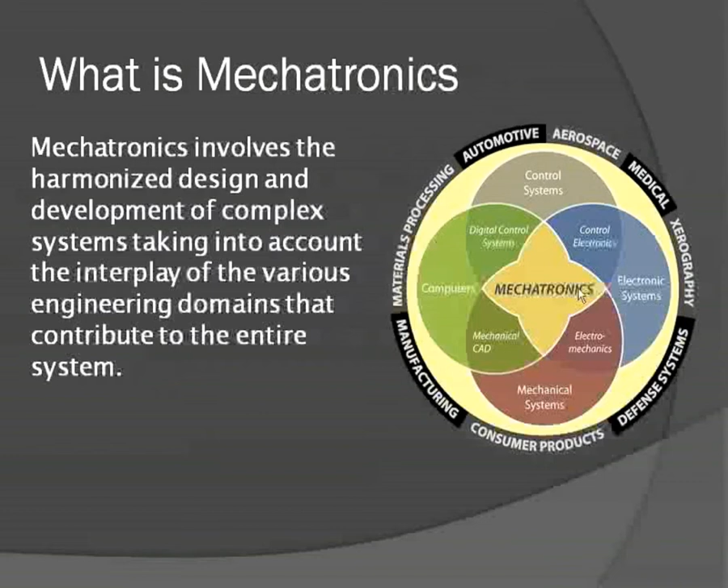So you don't just design a mechanical system, you don't just design an electrical system, you look at the system as a whole and design from the bottom up, taking into consideration all the elements that will eventually comprise the system. In the traditional design approach, and maybe in the last 10 years things have started changing, I'm looking only at two domains for now, but this can stretch out to a variety of domains, not just mechanical and electrical, but anything from aerospace to chemical.

Engineers typically design the core of the system, the mechanical design. They might do some simulations as the tools are available, and they also design the electrical system. There's always interplay between the electrical and the mechanical design, which are based on system requirements and specifications. And simulations are run independently. The mechanical system is simulated without taking into account the electrical characteristics of the system, or vice versa.

The electrical design is performed using the CAD tools that are readily available and simulated. And then eventually, typically they approach the control engineer and they say, well, here it is, we built it, now control it.

So mechanical design is done by itself, electrical design is done by itself. Eventually, a control engineer is brought in and they're asked to control the system. And the control engineer will run some simulations based on the system that's passed on to them. And as time goes on and simulations are showing potential performance, then the system is constructed and integrated. And as the system integration proceeds, there are more and more simulations and control design issues that are encountered.

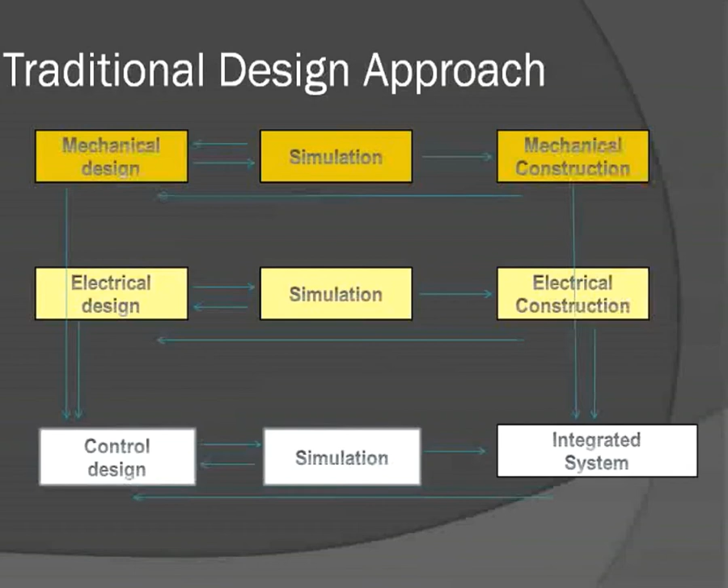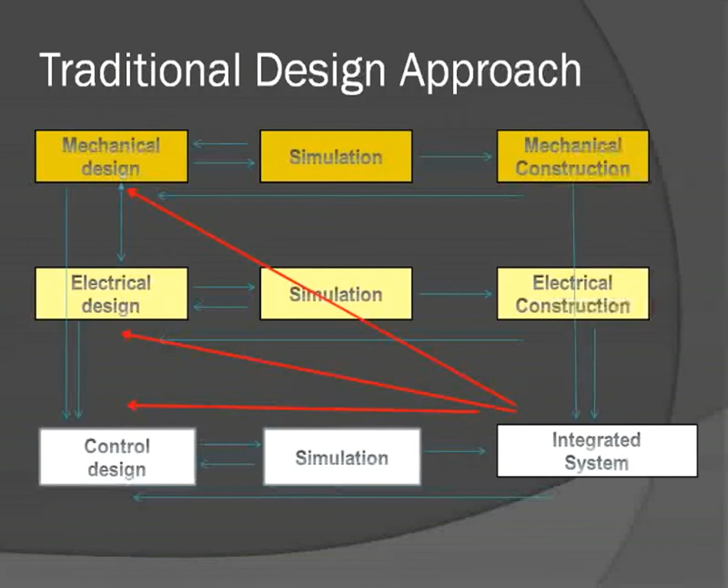So typically, you go back and start looking at the control system given the mechanical and the electrical system that you've constructed. Unfortunately, sometimes it doesn't work out, so you end up having to go back to the drawing table and doing some mechanical design and electrical design given the lessons that you learned from the system integration. We try to avoid those steps, try to do things more this way. But again, the system is not designed holistically. Parallel paths are taken, and eventually they're intersecting at the integration of the system.

Mechatronics, however, tries to approach the entire design in a holistic way. Holistic meaning taking into account the entire system with all its components. So not separate designs, but all designs are performed synergistically. And while one is looking at the electrical characteristics of some part of the system, they are also considering how this is going to integrate with the mechanical system, what controls are required, what kind of computer characteristics are required, what power requirements are required. They're all taken into account all together with constant interaction between the teams that are responsible for different domains in the system.

So in the mechatronic approach, you don't just do the parallel design of the mechanical and the electrical in this case. You would also take into account the control system, which as the design is progressing, is always feeding back into the mechanical and the electrical design, specifying constraints and capabilities of the system, as well as the constraints that are imposed by, let's say, the computation capability of the computer that's going to be used. And then the simulations would not be run just in one domain, they would be run in multi-domains. So you'd have a simulated system that incorporates all the domains into one simulation.

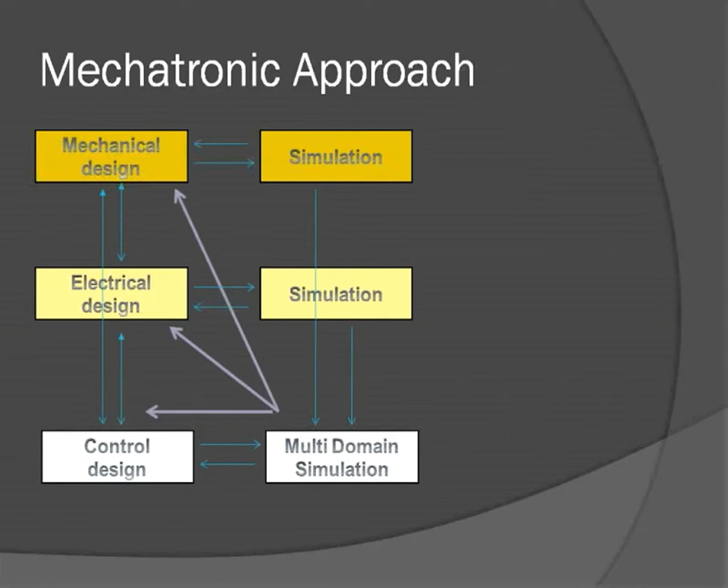Now that could result in a very complex system requiring a lot of computational power. However, you may simplify the simulations to incorporate just black box responses, but at any rate, you're always doing a multi-domain simulation, not ignoring one component while doing a design. And that multi-domain simulation can result in reviewing the mechanical design, the electrical design, and the control design. And once these changes are done, they should be automatically integrated into the multi-domain simulation and proceed from there. Once you're comfortable with the multi-domain simulation, if you can, you should also perform some hardware-in-the-loop simulations, taking into account some of the hardware that's already constructed, not necessarily in the same time scale.

And 3D animations are always helpful, so the multi-domain simulation would be running a 3D animation of a mechanical system if there is one. If it's purely electrical, then you can't do 3D animations. But 3D animations are very useful in visualizing what the performance of the system is in real time and changing parameters in hardware-in-the-loop simulations and observing characteristics and behavioral changes. As the simulations become more complete and satisfactory, then one would move on to constructing the mechanical system and then integrating that mechanical system into the hardware-in-the-loop simulation.

Ideally, the hardware-in-the-loop simulation would end up as the actual deployed system. So as you're developing hardware, you're also developing the deployed system. It could be an embedded system. You might be developing a hardware-in-the-loop simulation with the actual embedded controller. As the hardware-in-the-loop simulation progresses, you might be tuning the control design, but really avoiding these last two dotted lines that take you back to the mechanical design and the electrical design.

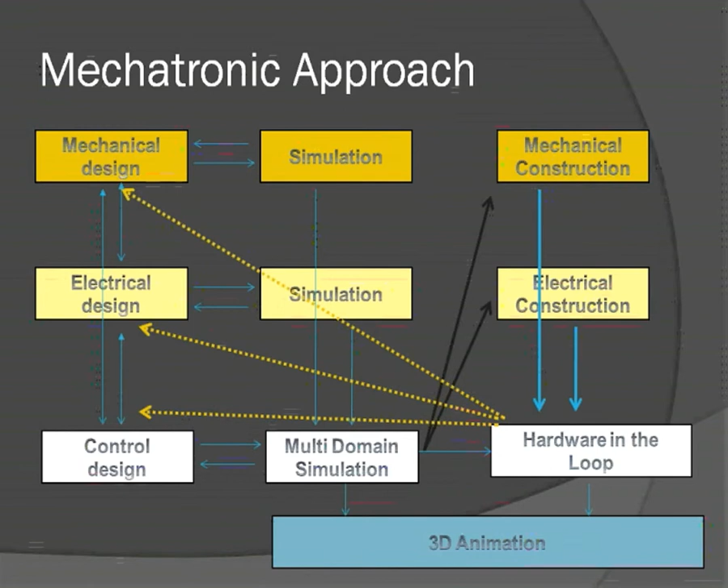So in concept, I'd like to look at what rapid prototyping means and how this relates to the mechatronic approach. Rapid prototyping has a common definition. If you look on the web, you'll find definitions for rapid prototyping. With Wikipedia, we're all becoming wikidemics.

You can look at Wikipedia and find out that rapid prototyping means the automatic construction of physical objects using solid freeform fabrication techniques. There are many products on the market that will take a SolidWorks drawing and make a physical object that is as close as possible to the SolidWorks drawing you designed, and therefore use that for prototyping. But that is only physical prototyping.

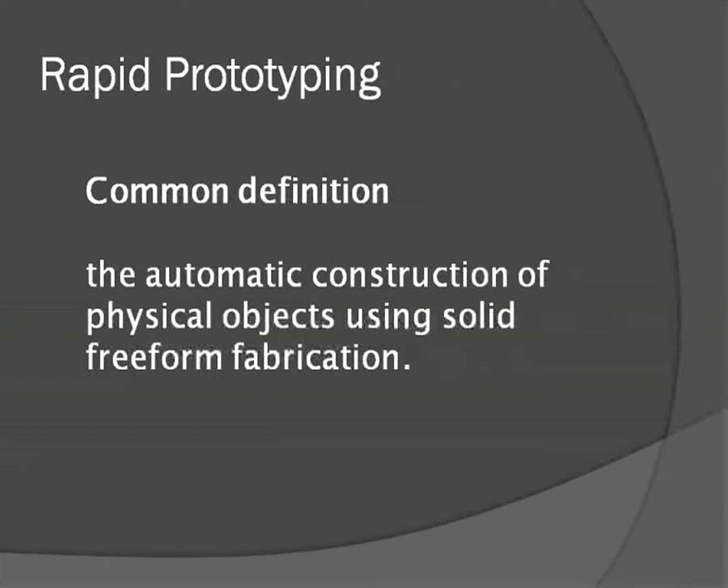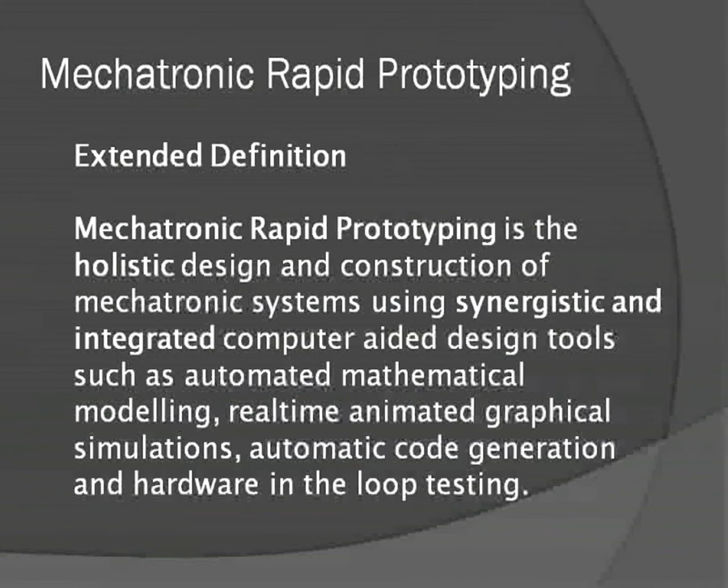I'd like to extend that definition by introducing this new term, mechatronic rapid prototyping. I'm extending the definition of rapid prototyping such that it encompasses the holistic design and construction of mechatronic systems using synergistic and integrated computer-aided design tools, such as automated mathematical modeling, real-time animated graphical simulations, automatic code generation, and hardware-in-the-loop testing.

So the ideal mechatronic approach would start with a concept which covers all domains. Let's say you want to design something; you figure out what domains you're working in, and you start with a very general concept in all domains, taking into account the interplay between them. As you're developing, you're also developing modeling and simulation in all the domains involved, and those feed back into each other until you have a concept you're comfortable with.

As the concept develops, you start performing some hardware-in-the-loop simulations before you do any kind of construction. From that, you loop back to the concept, which might require some design changes in some of the domains. But as soon as you make a change in one of the domains, that should automatically reflect into the multi-domain simulation. So any change done in any of the domains is always updated in the entire simulation paradigm.

As the hardware-in-the-loop progresses, you can start using rapid construction techniques, some of which could be the physical prototyping methods I described earlier. Along with that, you can use rapid construction of circuit boards, or outsourcing that can rapidly construct parts for you. Some things you cannot make in-house or with rapid prototyping techniques. You might have to do things in faster ways, but not in the traditional way.

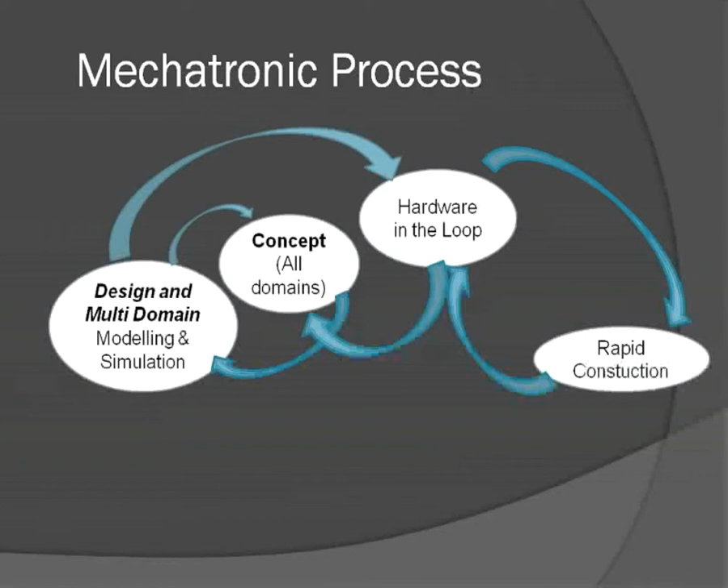Like you avoid injection molding by using rapid construction, using SLA or 3D printing techniques. You can also avoid large runs of circuit boards by going to rapid board manufacturers and assemblers. And that loop closes back into hardware in the loop. As you construct the system in components, you might eventually build up the entire system using rapid construction techniques, and then you're done.

Hopefully, you can also develop some 3D animations at the same time. So before you do any rapid construction, you are getting a better feel of the system using 3D animations that are run directly from the multi-domain simulation and the hardware in the loop.

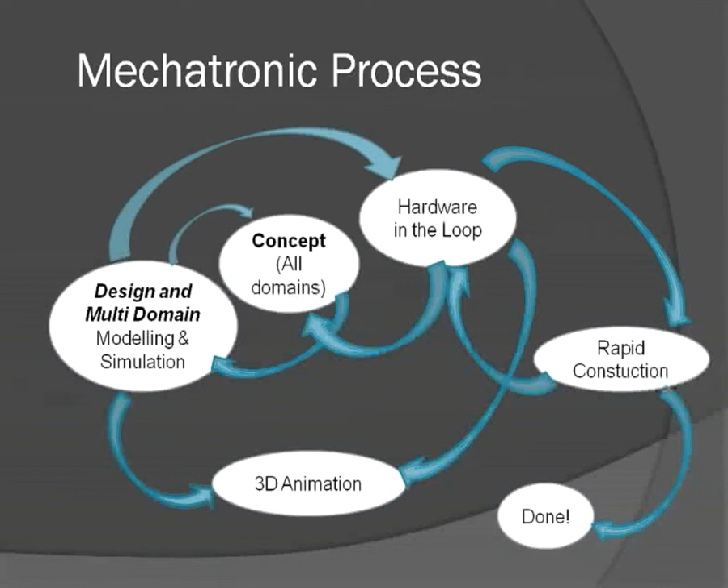So are we there yet? Can we really do this kind of approach? Well, all the tools are there, and we're striving as time goes on to develop a method that would lead us into this rapid scheme of developing mechatronic systems. So the tools are there, but they're not synergistic or integrated. I'd like to define those terms.

By synergistic I mean the interaction of two or more CAD tools such that their combined effect is greater than just the sum of their individual effects. So you might have a mathematical modeling tool, and you might have a 3D solid modeling tool. By themselves they're great, and each one individually can save you a lot of time. But when you combine the two together, you might get a tenfold improvement in productivity and in error-free performance than if you used one and then the other sequentially.

And by integrated, I mean organized or structured so that the CAD tools function together seamlessly. I don't want to use one package and then move to the other package and launch some other kind of interface and have a complicated way of connecting the two together. I'd like to do this seamlessly without manual or programmer intervention.

I'm talking about a wish list here. I'm not saying this is done. This is how I'd like to see things moving so that we can move into a rapid prototyping environment for mechatronic systems.

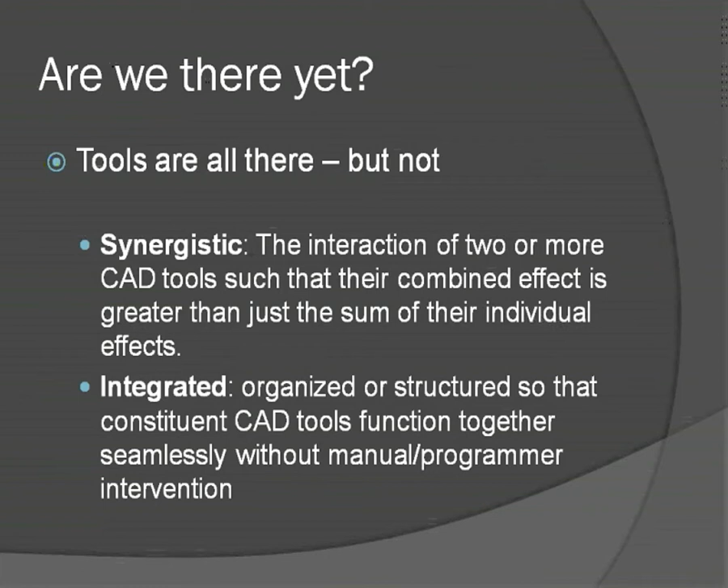The tools that are there, we use a lot of these tools at Quanser. For mechanical, we're using SolidWorks. For electronics, we're using CADStar. There are many other systems out there that perform the same type of work as SolidWorks and CADStar.

For modeling and symbolic math, we've been using Maple for close to 18 years now, and Maple meets our needs for symbolic math and simulation quite well. Design and simulation, we use MATLAB and Simulink regularly and consistently, and we've integrated MATLAB and Simulink seamlessly with a hardware-in-the-loop development system called QuaRC. QuaRC is developed by Quanser and supports code generation from Simulink to run real-time code and perform hardware-in-the-loop testing as well as deployment.

For animation, we are using OpenGL, and sometimes when it's too difficult to actually develop the dynamical equations of a system, we have looked at the PhysX engine to give us dynamic performance in simulation mode only for some dynamical systems.

I'm going to go through some examples on how we have attempted to use this rapid prototyping approach for mechatronic systems using three different applications that we've worked on in the last few years. The first one is a handwriting reproduction robot. So the goal of this project was to develop a robot that will reproduce signatures from a remote tablet.

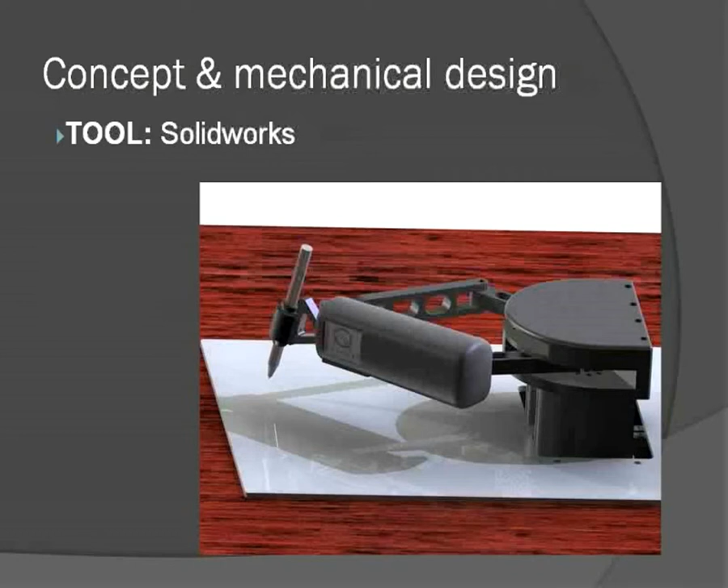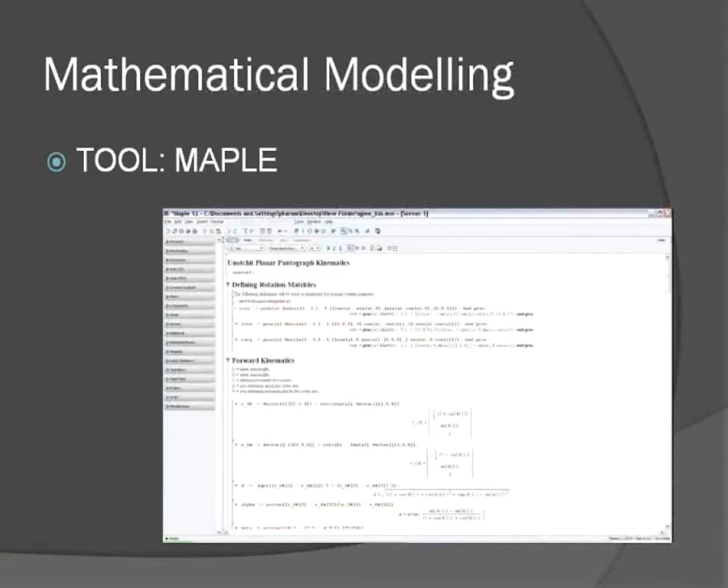So when we want to derive the mathematical models for this thing, we rely on Maple heavily. With Maple, we start from the basic principles, defining transformation matrices, as well as Lagrangians and dynamics to develop the differential equations. Once we have entered all this in Maple, we have a systematic way of going through the equations, letting Maple solve a large chunk of the equations, thus producing error-free differential equations and kinematic transformations, and converting these into C programs using the code generation capabilities of Maple.

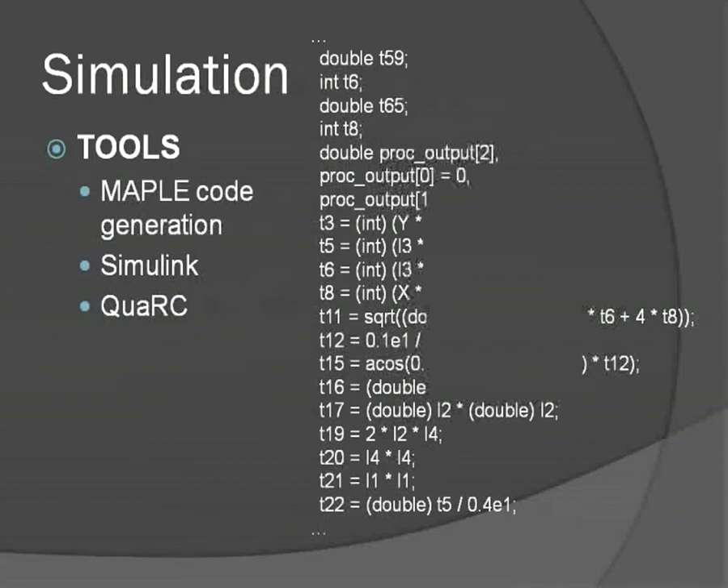Once we do that, then we can develop a simulation of the system using the Maple code generation and embed that into Simulink S-functions. As you see here, I have a section of code that was derived from that code generation section of Maple. Anybody who's using Maple code generation can recognize their temporary variables, T3, T5, T6, T8, etc.

So we embed that all into a Simulink S-function, which will now run in real time using QuaRC, and we can run real-time simulations on the system without actually building it in any way. We did not attach this to any graphics in this case because it was only a 2 degree of freedom system. We were able to monitor the X and Y motions using simple XY plots. And we were able to tune the system, and from SolidWorks, we can also get all the mechanical characteristics of the system, like joint center of mass, inertia, masses, and embed that all into the code-generated functions.

And the nice thing with the code generation, they can all be parameterized. So it's not a differential equation for which you have no control over the variables. You can actually individually change variables on the fly, right from the simulation, and observe the changes in the system dynamics as you are changing specific parameters.

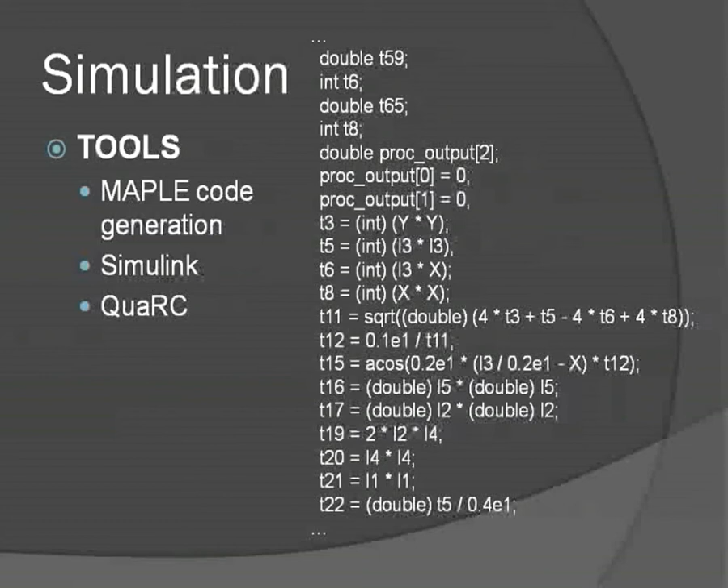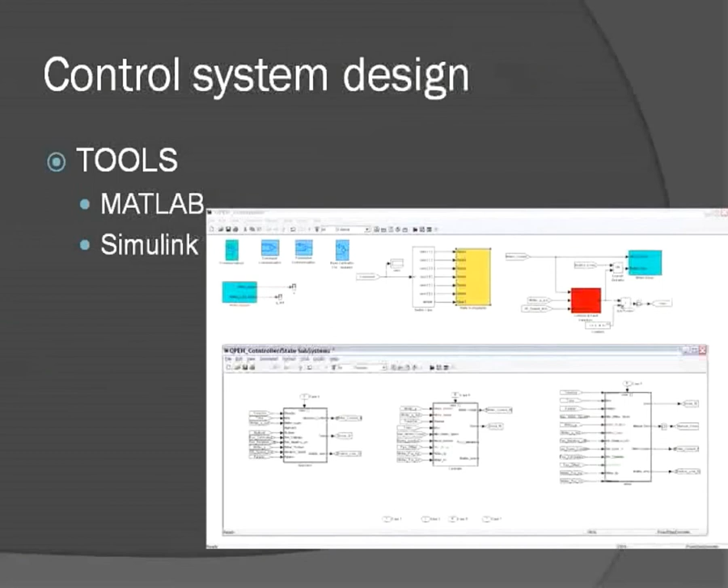If you need some other parts cut, there are other methods of moving diagrams to local water jet cutters or laser cutters, so you can get some precision parts made very quickly and rather inexpensively.

Following the construction, we integrate the whole thing using a hardware-in-the-loop integration software called QuaRC. We also needed to run this thing remotely using a communications package, and QuaRC also embeds communication toolboxes that support a variety of communication schemes such as TCP/IP, UDP, or serial.

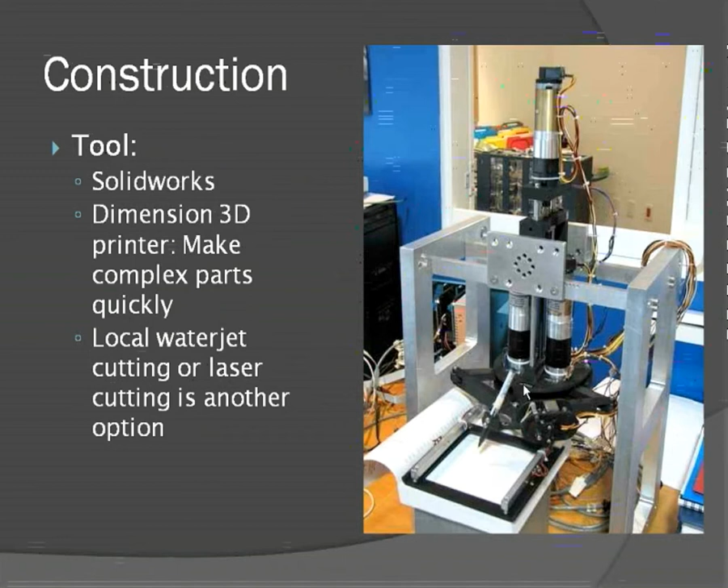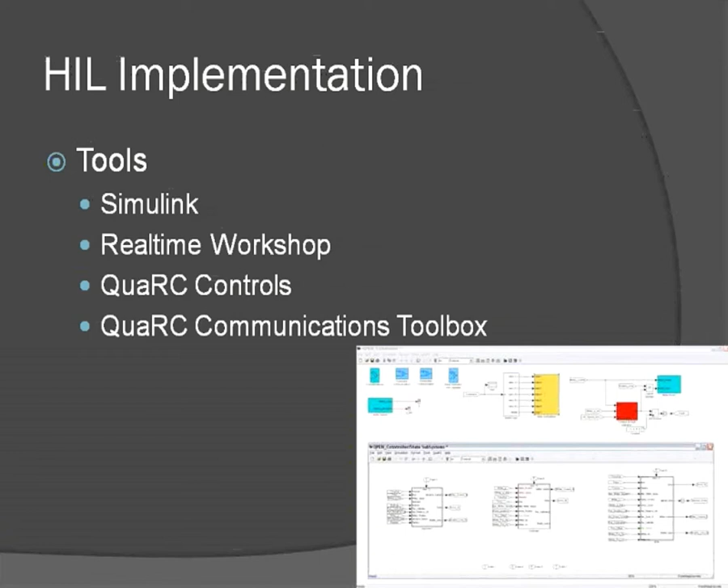So we were able to run this robot remotely and control it via this diagram without writing a single line of code eventually, by just integrating Maple generated code into S functions and using all the standard Simulink and QuaRC libraries to control the system. So really not a single line of code was written here to get this thing up and running. And that was again done using QuaRC.

So just to describe the process in general, how this was done in a mechatronics approach using rapid prototyping, was we started with SolidWorks. And unfortunately, through a complex and manual process, we had to take the SolidWorks system and convert it into a kinematic and dynamic system and code that into Maple.

But once that was done, then from Maple we were able to generate code for the system dynamics and the kinematics, embed that into Simulink, and then run some simulations and iterate the design before we built anything. Once we were comfortable with the design, then we started printing parts and constructing the system. And that process is automated. It's a simple printer, essentially, that you take from SolidWorks, click print, and you print the parts.

Construction is manual. You cannot avoid that. We're not looking at large production runs. We're not going to automate the construction process. After all, it is called rapid prototyping, so it's okay to use some manual construction, and the integration is manual.

However, going from a simulation to a real-time control system is also automatic. We take Simulink diagrams, use Real-Time Workshop, generate real-time code that runs with the aid of QuaRC, as well as the real-time communications package. The entire thing is then iterated through QuaRC and Simulink once it's constructed. And if there's any minor changes, you can reiterate through SolidWorks and print some new parts.

And eventually we deploy it, and since QuaRC can actually be deployed, the code that's generated from Simulink can now be deployed into a standalone headless system that does not need Simulink, MATLAB, or Maple, or anything else, just the operating system and the code that was generated, and run a real-time system and perform signatures remotely using this robot. So this is one example where we used what I'm calling a rapid mechatronic prototyping system.

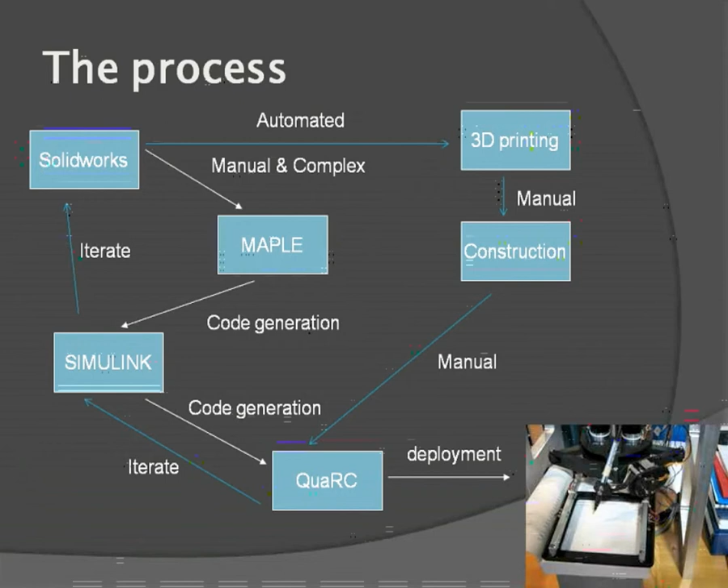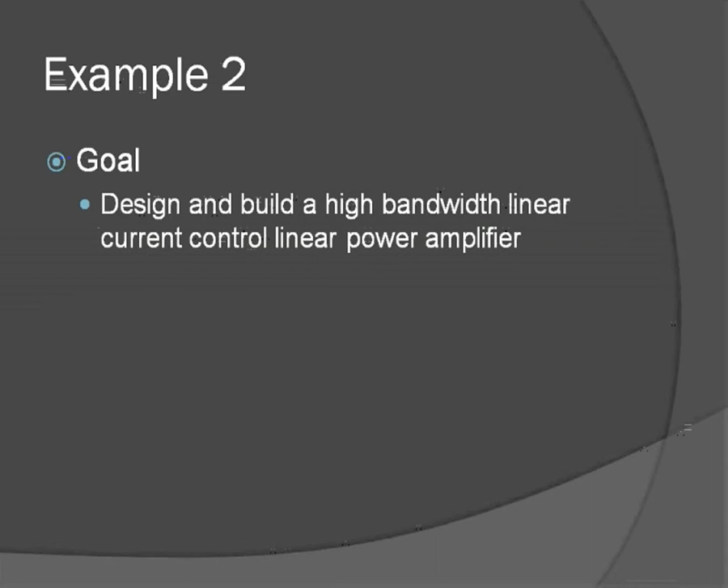Another one was a purely electrical design. We were asked to design a high bandwidth linear current control amplifier. And in this case, we start with CADStar, which is our in-house design tool for designing electric boards and laying out electric circuits. However, when you run a simulation for electrical systems, you cannot really change mechanical parameters.

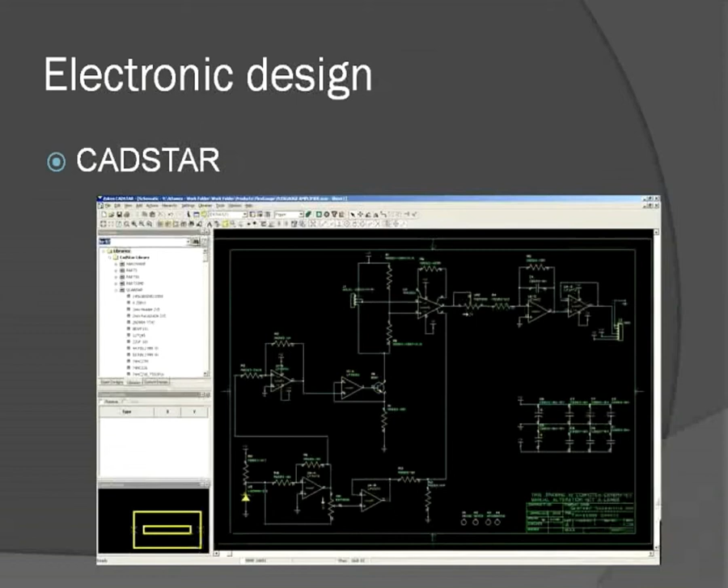If you want to drive a motor with this amplifier and you want to be able to change the inertia of the motor or the inertia of the load, or introduce some backlash into the dynamics, that cannot be done using just CADSTAR or any other electrical simulation package.

So what we did, we developed a mathematical model that incorporates loads and inertia parameters right into Maple and developed the differential equations accordingly, and then moved that into MATLAB and developed a simulation in MATLAB in order to design the parameters, again, parameterized simulations, not just black box simulations. So you can change every variable in the design and observe its effect on the actual response of the system directly from the differential equations that are derived from Maple.

And then, again, simulate the system, embed the code that's generated from Maple into S functions, perform a full design on the system. For example, attain ideal step responses and frequency responses. Real-time simulations look at time responses and transients, saturation effects, nonlinear effects, loading effects, variations in load parameters. All of that is done from code that's been generated from Maple and embedded into MATLAB and Simulink and run in real time using QuaRC.

If the simulation requires non-real-time simulations but very high sample rates, then we run it in non-real time. In this case, the simulation was non-real time when we're running with sample rates of 100 kilohertz or small step sizes for the integration.

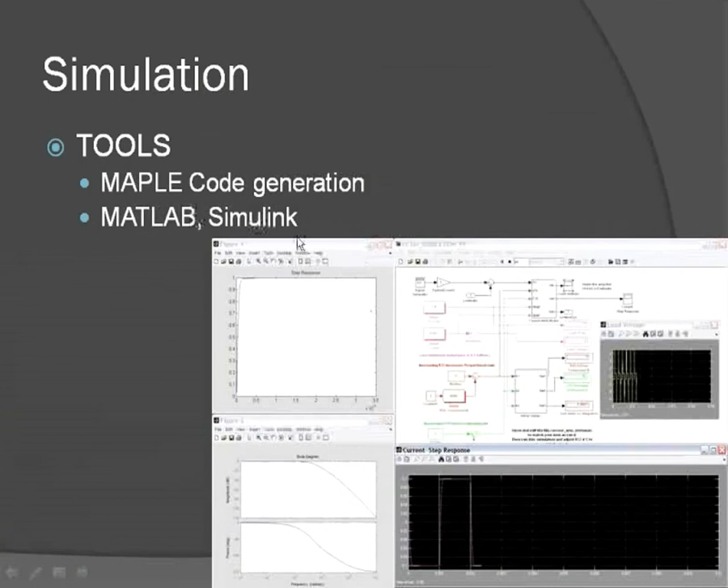Again, the same stuff was also used to generate an automatic production testing system for the runs that we are making. After the rapid construction of the first few units, we went into production of these amplifiers, and we were able to use the models that were generated in order to generate a reference model and test production runs against an actual reference model.

So we have a real-time system running along with a simulated system and comparing them side by side as they go through production and come up with a report. And that report is automatically created by testing the system and comparing it to expected performance variations.

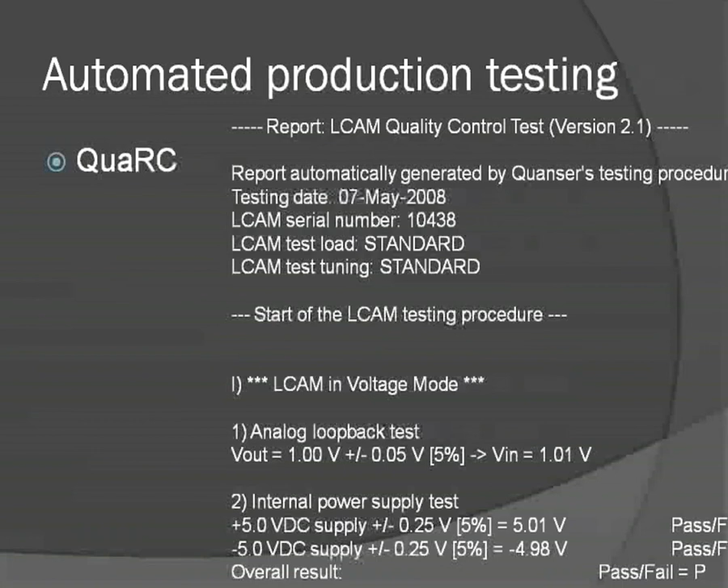So the process that we use here is, again, we had our in-house design tool for the domain that we're interested in. In this case, we're using CADSTAR for electrical design. We, again, had to derive mathematical equations using Maple, but the transition from CADSTAR to Maple was, again, manual and complex. You had to be an electrical engineer to understand how to derive these equations.

You could not just drop in an electrical component and say, okay, well, let's make the differential equations that make up this whole system with all these electrical components. You have to be an electrical engineer in order to derive these equations. Once the equations are derived, then we use code generation from Maple and embed those in Simulink. Again, iterate the process, then move into manufacturing.

In this case, we don't manufacture our own boards, so we outsource those to rapid board manufacturers and then integrate it. And again, automatic code generation generates real-time code that will test the boards, and then we iterate the test process and the response that we get from the boards as opposed to simulation. Following that, we deploy the system and we have a final product.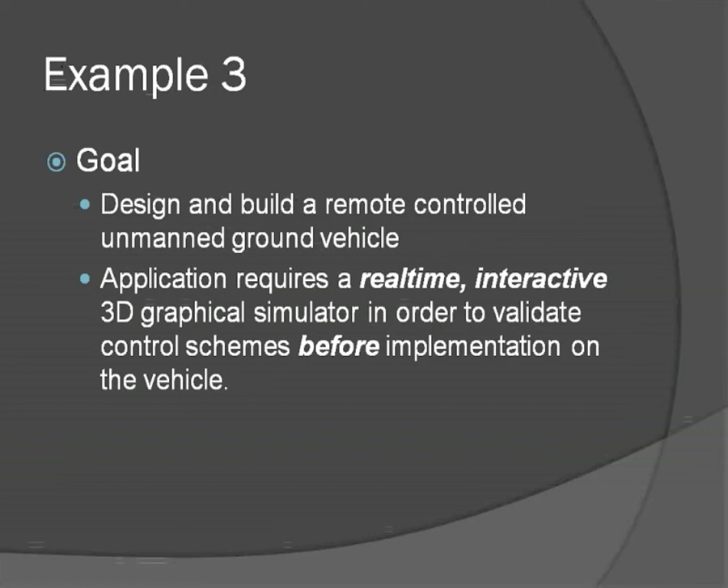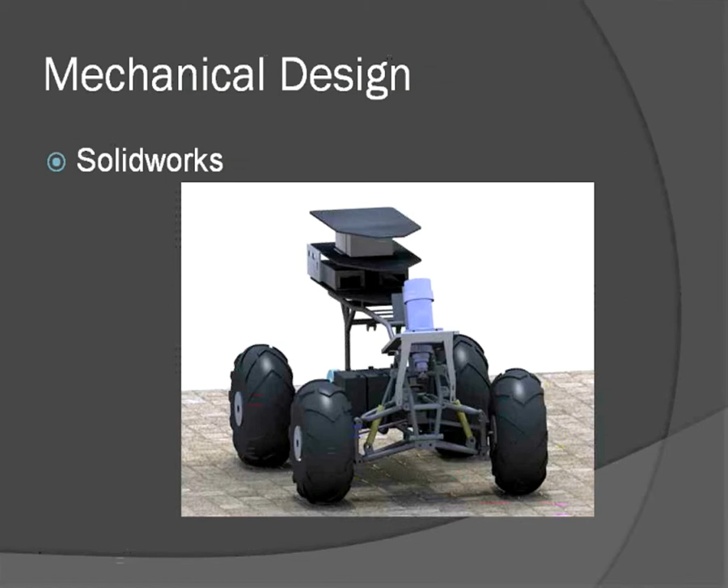So we have a mechanical design, again, performed in Solidworks. The entire system is designed in Solidworks, and we'd like to simulate the system in real time as well as animate it in real time and interact with it in real time as if we're driving the real thing. And once we're satisfied with the performance, we're going to build it and eventually drive it remotely. But before we drive it remotely, we'd like to make sure it's going to be stable and running properly.

So the tools we used to develop the mathematical model for this were a little different from what we showed you in the previous two examples. The differential equations for such a system comprise a variety of degrees of freedom: compression of the tires, compression of the suspension system, torques, steering, friction on the wheels, dynamic motion of the platform, accelerations, centrifugal torques, slippage, braking. There's a lot of dynamics here that are not that simple to model.

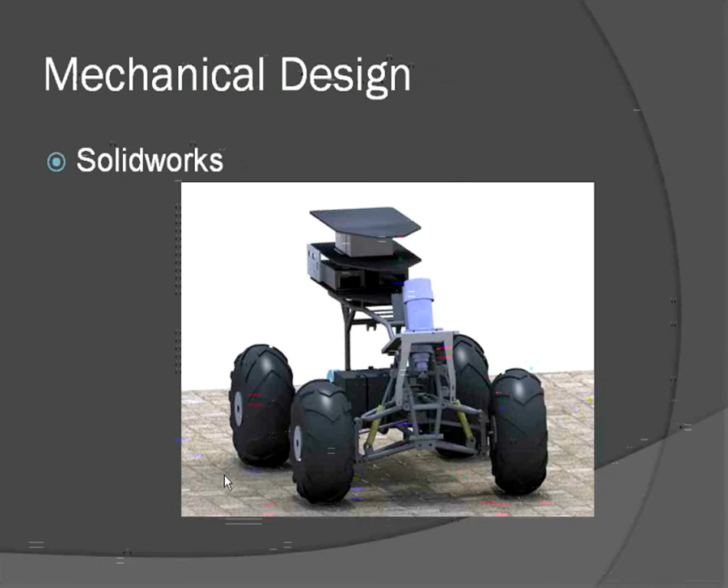So it would be nice to have a block that says drop in the car with these properties and let's simulate it. It's not that simple. So we opted to use something called the PhysX engine. The PhysX engine is a physics engine that is used in gaming, and it turns out that it's actually quite good for simulating dynamical systems with multi-degrees of freedom and multiple contact points. So we use the physics engine to build the simulation for the dynamics of the system and the kinematics.

We also used OpenGL separately to draw up a 3D model of a mock-up of the system in an environment which has physical and dynamic properties. We drop some planks of wood and a tree, each one with different properties, and you can actually drive the simulation using a joystick.

And in this case, we also have haptics incorporated, so you actually feel that you're driving the vehicle using haptics. So all the forces and the kinematics and the dynamics, however, are solved separately using the PhysX engine, and the graphics are driven separately using an OpenGL interface. However, we still want to do all of this through Simulink and QuaRC.

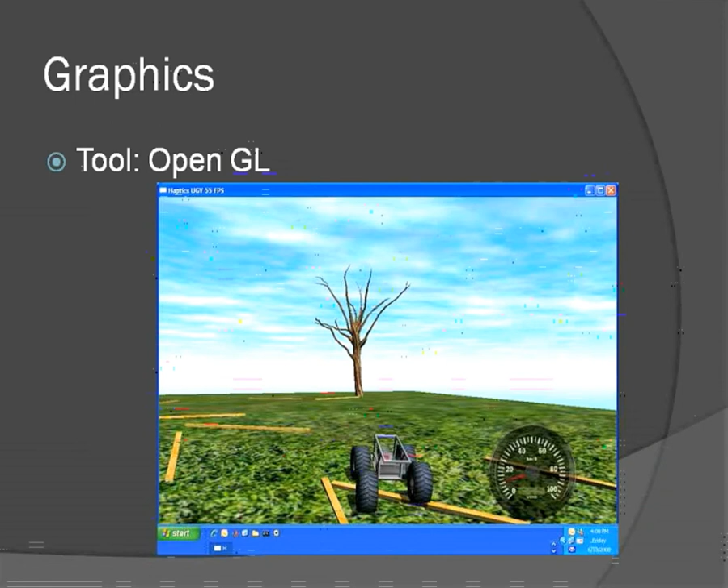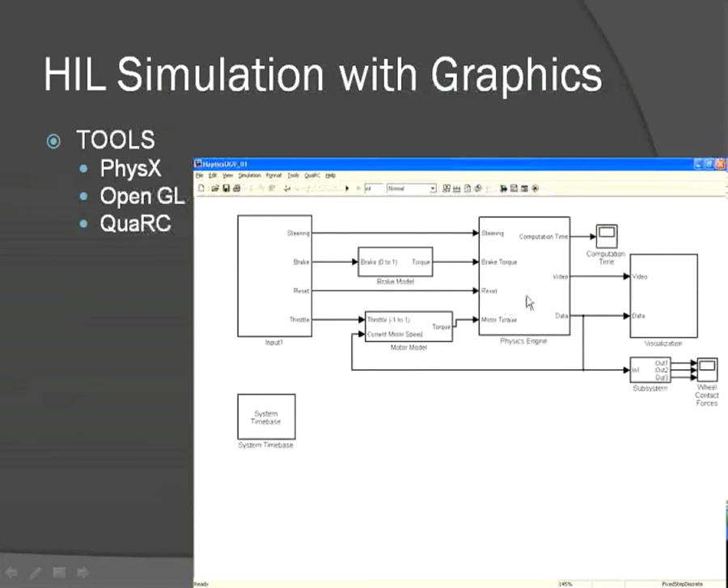We run the diagram at 1 kilohertz. We're able to update the physics engine at 1 kilohertz. The visualization is done at 30 hertz. So using the system, we're able to modify parameters in the vehicle before we build it, change control system parameters, change loop gains, integrators, filters, change all parameters and drive this thing in a virtual environment

before we construct it. And once we construct it, we will still use the simulator in order to confirm control schemes before we actually implement them on the actual vehicle. So the process: start with SolidWorks, draw up the system, move to PhysX engine, and move to OpenGL to do the graphics. Two completely different environments and domains.

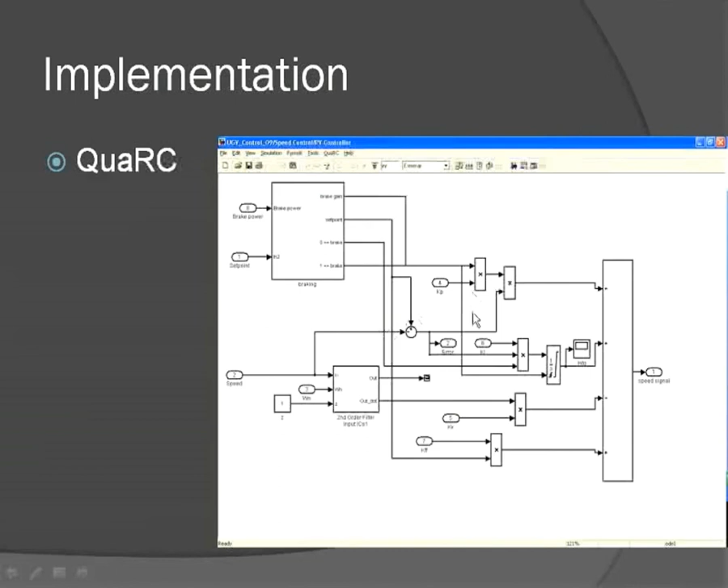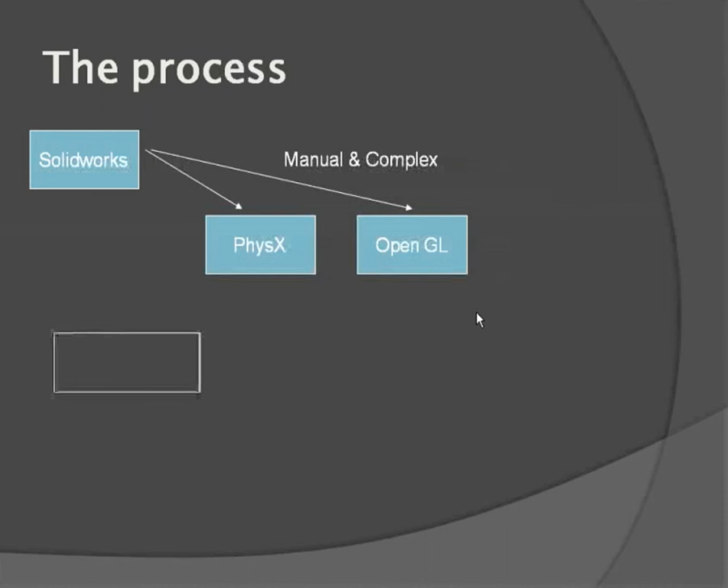And again, a manual and complex process to take from SolidWorks to PhysX, and to OpenGL. They have different ways of thinking. They're not integrated. They're not homogenized. Not one thing in PhysX is related to one thing in OpenGL. Completely unrelated. Eventually, we integrate all those into Simulink and 3D graphics. But once we've done that, then again we have a full simulation that we can iterate as well as generate code in real time and run in real time.

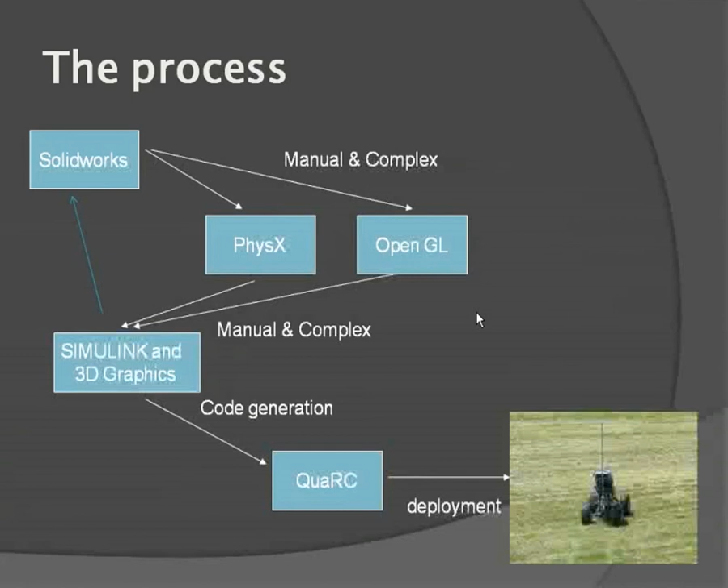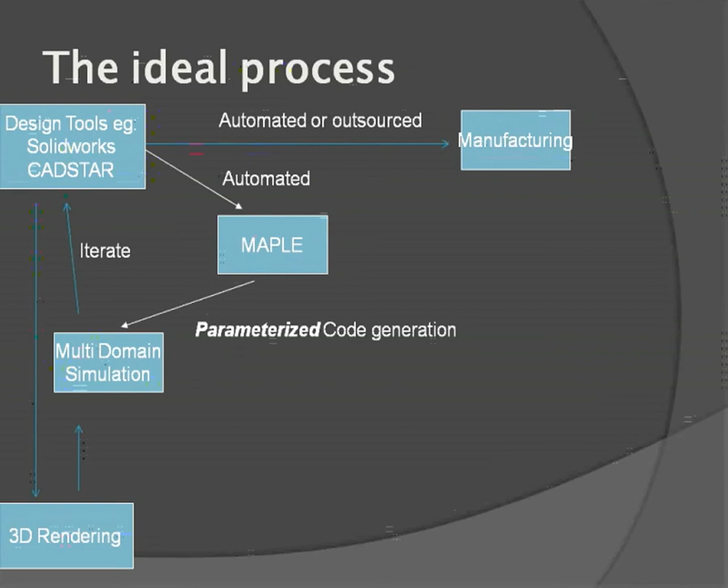Following that, you would go to automated or outsourced manufacturing, and the process then remains the same, because after that, it is quite automated. Well, multi-domain simulation we're doing now from Simulink, but Simulink itself does not have multi-domain simulation. We're embedding the multi-domain simulation by writing our own S-functions for the different domains and embedding them into Simulink, and thus creating an integrated multi-domain simulation by hand.

But once that's done, then you can move into code generation and make the simulation in real time, or eventually use QuaRC for deploying the system. Of course, you go through the iteration steps by QuaRC and simulation, and then move to deployment.